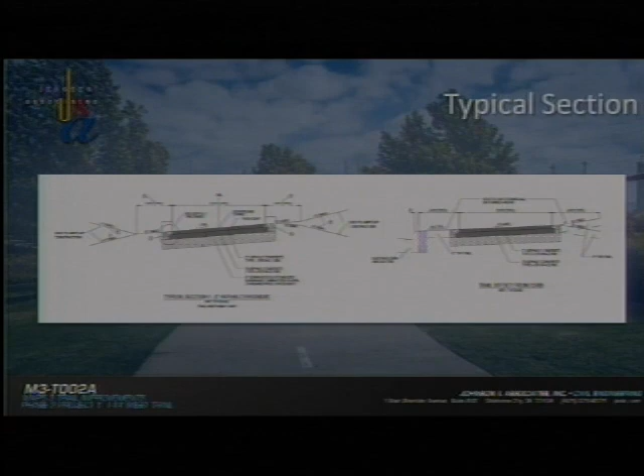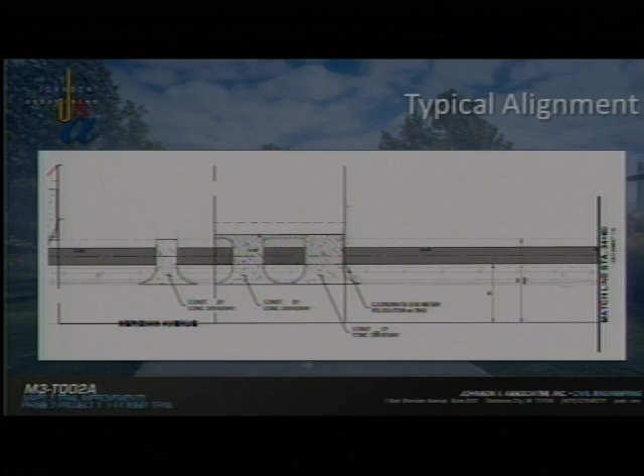In plan view, looking from above, this is a typical alignment for Project 1. Most of our trail is adjacent to the street, so we've located the trail, which is the dark gray strip there, as close as possible to the right-of-way in order to have some separation from the roadway. This also shows crossing several different driveways, and at most of those crossings we're going to take driveways out and rebuild those in order to meet the accessibility requirements for the trail.

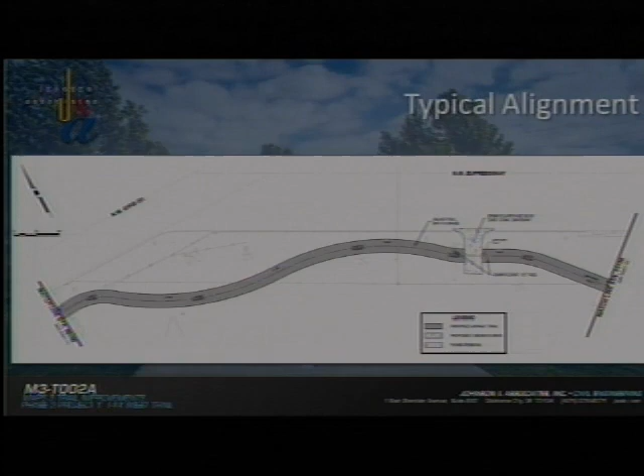So we'll look in some detail at the alignment. This is at Northwest Expressway and Meridian. We'll begin at the existing parking lot at the northeast corner of Meridian and Northwest Expressway. We'll connect to the existing trail that goes around the Lake Hefner facilities there. We'll cross Northwest Expressway on the east side of Meridian and head south to Northwest 63rd. We'll cross Northwest 63rd to the south side at that existing traffic signal, and then we'll head east down Northwest 63rd again on the south side of the street.

Going down 63rd Street, we'll cross several driveways, a few shopping centers, some public streets, avoiding quite a few utilities. As you would imagine, in an urban area, there's plenty of utilities to deal with along the route.

Along Northwest Expressway, we'll be on the south side. As I'm sure you're all familiar with that bit of roadway, that's a lot of right-of-way right there. We probably have about 50 feet of right-of-way, so the trail will be as far away from Northwest Expressway as possible, in order to maintain as much separation between the trail and the roadway as we can achieve. We do have one drainage structure to cross in Project 1, here on Northwest Expressway, just under the N. It's a drainage channel, and we're putting a pedestrian bridge across that structure.

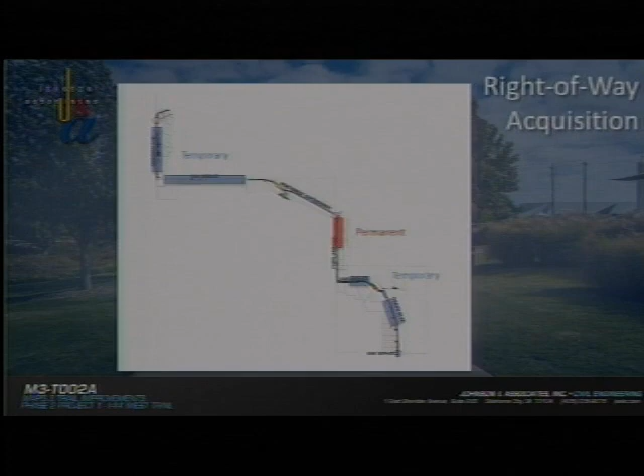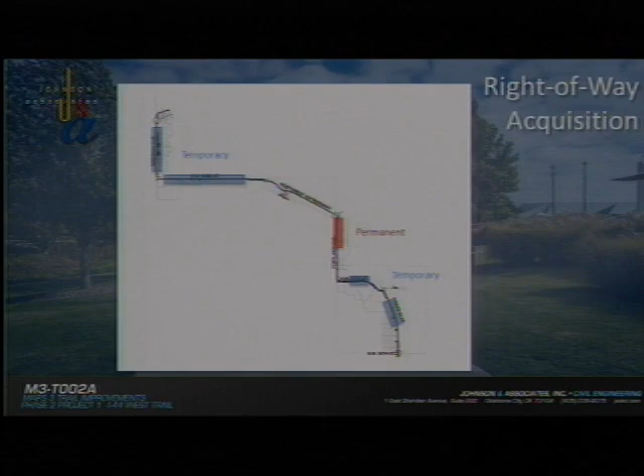A little bit of right-of-way acquisition to do with Project 1, most of which is temporary. That's for rebuilding driveways and parking lots as we get into making accessibility and grade separation work. We have one location for permanent right-of-way, which is at Northwest Expressway in Portland, on the east side of Portland at Messiah Lutheran Church, where the sidewalk, the trail, gets into the church's property there.

For schedule, we're here with a preliminary report today. We estimate another 60 days to finalize plans and specifications. We'll also begin right-of-way acquisition during that time. We have 3 months allotted for final approvals, bidding process, and award of contract, and then anticipate starting construction in September of this year, and we've allotted a 10-month construction window for the project. That'll have us finishing up, I believe, in July.

Dave, would you help me out with that date there? I can't see that screen very well. Okay, it's July, so 2016 was when we'd wrap up construction. So with that, I'd be happy to answer any questions for Project 1.

Questions? Sue, anything from the subcommittee? One thing I might remind everyone on this board is this is an urban trail. So it's not around a lake. It will be by some parks, but it's a challenge to build a trail like this, and it's new thinking for all of us. All three of our pieces have really taken into account how to do that. They know better than we. This is new for Oklahoma City, and the committee is excited, and I think all of our developers understand our concern about safety. So that's also foremost on their minds, too, as we develop these plans. So the committee did move approval.

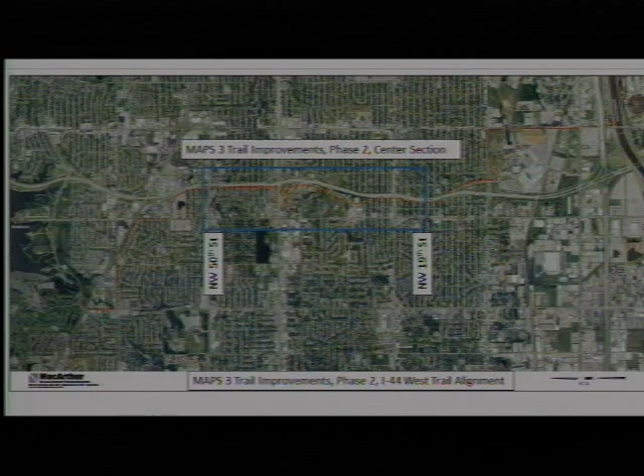Again, as David and Chris have both mentioned, this alignment is based on the alignment study report completed last year. This image shows the extent of the entire trail. The central section is shown in the blue box, beginning at Northwest 50th and ending at Northwest 19th Street, connecting to the North Trail at Northwest 50th and the southern part of the trail at 19th Street.

A quick overview of the center section: 2.77 miles in length, beginning at Northwest 50th and Grand and ending at the south side of Northwest 19th Street and Grand. There are three major signalized intersections in this section: Northwest 39th, Northwest 36th, and Northwest 23rd Street. Some points of interest identified in the Trails Master Plan would be Portland Plaza and Will Rogers Park.

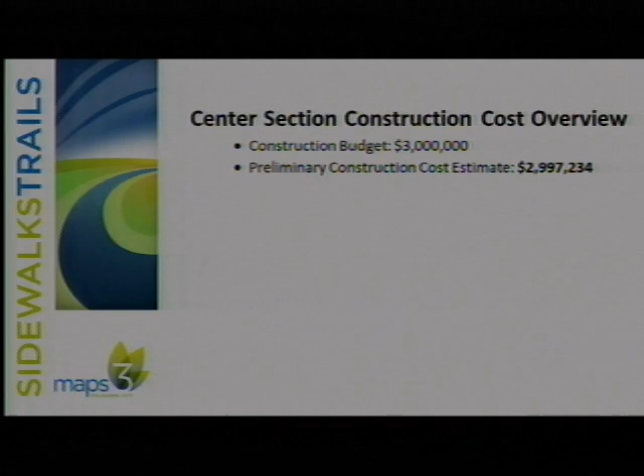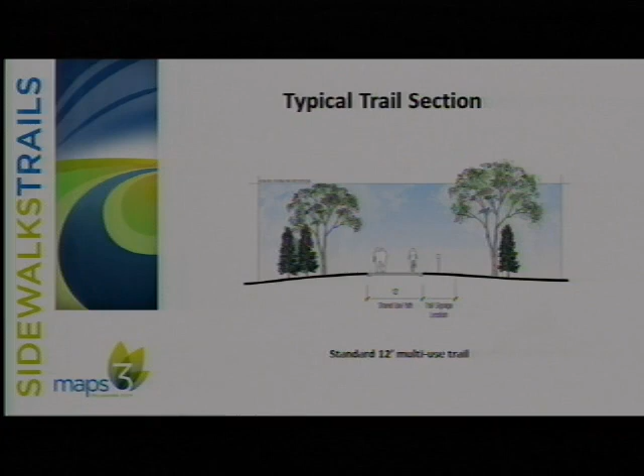The construction budget, as I mentioned, is $3 million. We're coming in just a little under that, $2.99 million, based on preliminary design. Again, this is going to be similar to all three sections. This is an image showing a standard trail section: a 12-foot-wide asphalt section, with space for shoulder on either side.

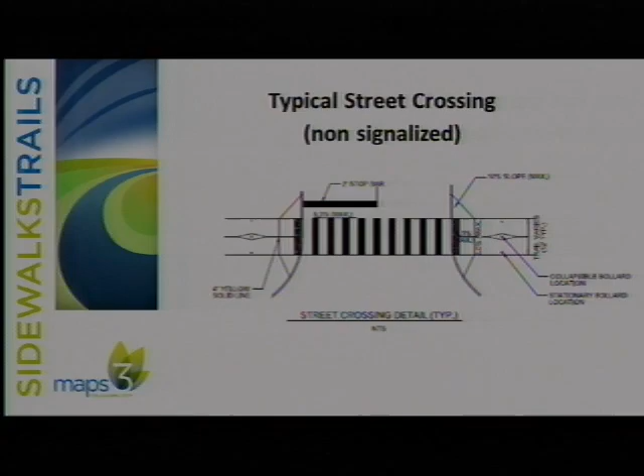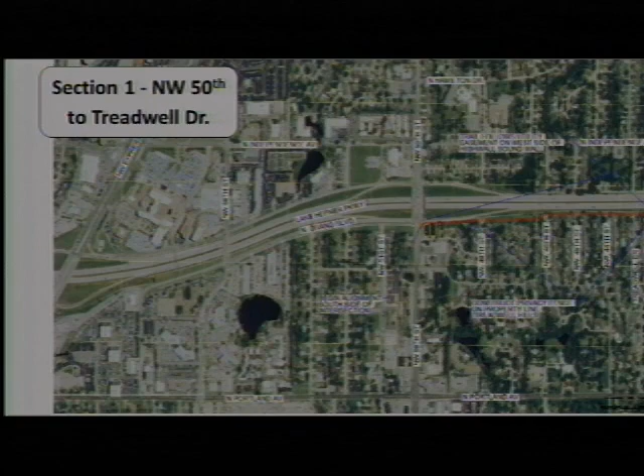I've split the central section into three parts so we can look at the alignment in more detail. As I mentioned, we begin on the south side of Northwest 50th Street, at which point we follow the existing utility easement, which runs on the west side of I-44, between the Lake Hefner Parkway sound wall and the edge of the Treadwell Hills neighborhood.

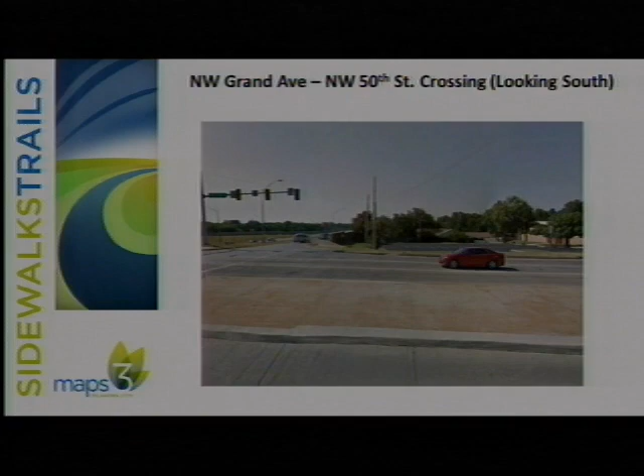This image shows the beginning of the central portion, at the Northwest 50th Street intersection looking south. You can see the beginning of the utility easement in the center of the picture. This is a typical view of that utility easement—you can see it's between 30 and 50 feet wide, so we have a lot of space for the trail.

We can avoid trees and utilities in this area. The street the image is taken from is Northwest 48th Street, and you can see it's a dead-end street, but it is a city street, so we still have to cross it. People use it to turn around, but it's a lot safer than a standard street crossing.

This is just one more image, and you can see some of the utility impacts in that area and some of the things we'll try to avoid with the trail. You can also see the edge of the properties on the right of the image. There is provision in the preliminary design to look at replacing that fence.

That's one item we would consider. Obviously, people don't always have the same type of fence—some people don't have a fence at all. So something we would consider is putting a fence along the trail at the property line.

The next section of the trail continues on that utility easement all the way to Northwest 41st Street, at which point Grand Boulevard continues, and we'll follow Grand Boulevard all the way to St. Clair, which we'll use to cross Northwest 39th Street, or Northwest 39th Expressway, on the east side of the road, and then we'll continue on St. Clair Avenue.

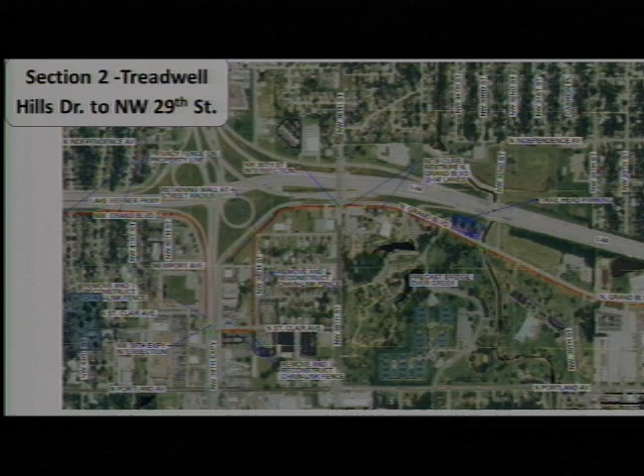There's also a creek through the park, so we will require a pedestrian bridge over that creek. A couple of images of that section.

This is the Northwest 39th Street Expressway. You can see the ODOT right-of-way fence. That fence will be reconstructed as part of this project. It's a short section - it'll just ensure that we have a consistent fence alongside the trail to separate it from traffic.

This is the signalized crossing over at Northwest 39th Street. You can see that there is infrastructure in place that will obviously be modified to incorporate the trail section there.

This image is Grand Boulevard looking north towards Northwest 36th Street. You can see the Will Rogers Exhibition Center, and you can also see the landscaped area between the parking and Grand Boulevard. In the design, we try to avoid impacting that.

This street is actually between 38 and 40 feet wide as a two-lane road, so we have room to move that existing curb out into the street 5 or 6 feet to allow us to get a trail alongside that landscaping area without impacting it at all. So the curb will be shifted over and the stripes will be repainted to construct two standard 12-foot lanes. This is the trailhead parking area I mentioned.

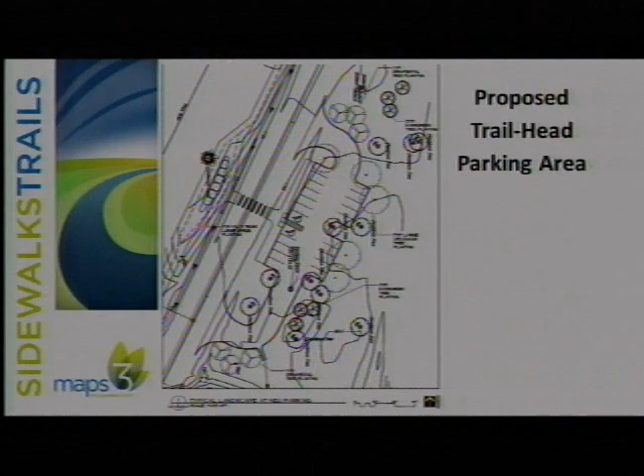On the other side of Grand, you can see the existing trees, and the design incorporates keeping those trees as much as possible - almost designing the parking around them. You can see from the next image how we've got new plantings and also the existing trees built around the parking area. That parking area will have about 30 spaces, but we have the flexibility to add a few more depending on exactly how much space we have.

Finally, the last section takes us all the way to 19th Street. We'll continue on the west side of Grand Boulevard, all the way to the south side of Northwest 19th Street, where we'll connect with the southern part of the project.

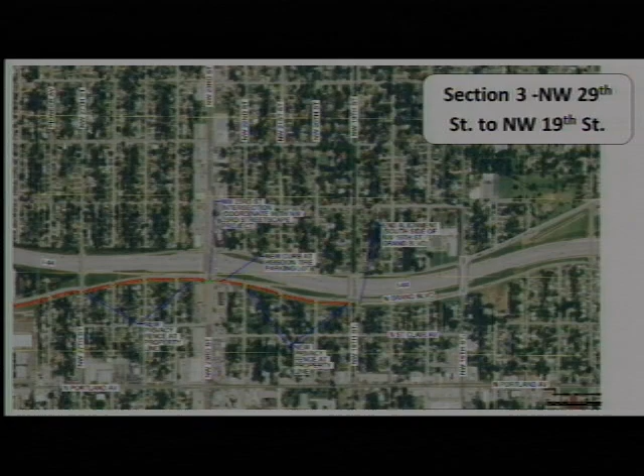We do have a major intersection at Northwest 23rd Street. That street is currently being reconstructed as part of the Northwest 23rd Street streetscape, and we've been coordinating with the design engineer and also the City of Oklahoma City just to ensure that what they're doing meshes well with what we have planned. We don't want to rip out the ADA ramps that are going to be constructed, so they're going to have wider ramps at that location that we can simply tie into when we start construction.

This image is taken at the intersection of Northwest 23rd looking south. You can see there is a Hibdon Tire Plus at that location - this just gives an example of where we'll be going. You can see the existing right-of-way line actually runs on the nearest parking areas, so that facility is actually in city right-of-way, meaning we'll be utilizing some of that area. We'll minimize the impact to the business, but we don't require any easement at that location - it's just a case of reconstructing what's there a little bit to allow the trail to pass through.

Continuing on, this is at Northwest 27th Street looking south. Much like what I described at the utility easement south of Northwest 50th, this is another area where we have made provisions to build a fence alongside the trail. It's something we will consider as we go into design, but there are some areas with no fence and some with fences falling apart, and this image illustrates that. The nearest fence is not in good shape, and the next home doesn't have a fence at all, so constructing a fence would help create a separation between the properties and the trail.

And this is the end of this part of the project. This is Northwest 19th Street. We will cross over at this location and transition into the southern part of the trail.

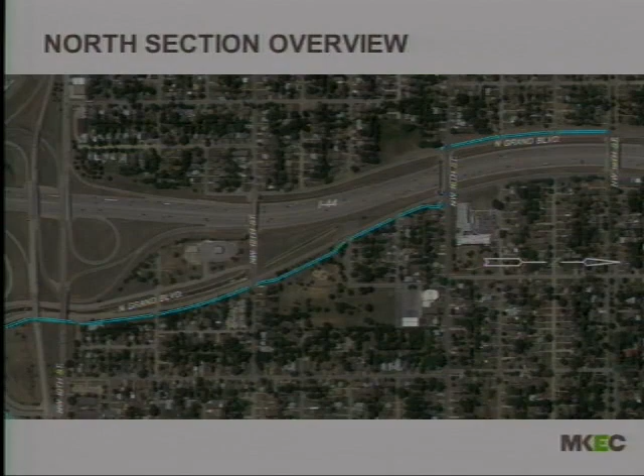I'll go over these sections in more detail. This is the north section, and we'll pick up on the south side of 19th Street, where MacArthur stopped their portion of the trail. We'll go along the west side down to Northwest 16th Street, using that existing bridge to cross there—I have a detail of that we'll talk about in a minute. Then we'll run along the east side of Grand Boulevard all the way down and under the existing Northwest 10th Street bridges.

These are just some details, a few photos here. This is the existing Northwest 16th Street bridge, and as you can see, it's striped for 3 lanes of traffic, with some additional pavement area before you get up onto the sidewalk. So we'll be utilizing that for bike lanes as well as the existing sidewalk for pedestrians.

This is a detail of that crossing. What we're suggesting is that the bike lanes will be on pavement and directional. For instance, westbound bicyclists will use the north side of the bridge to cross, running with traffic across the bridge. Eastbound bicyclists will use the south side of the bridge, also running with traffic, and pedestrians will use the sidewalks.

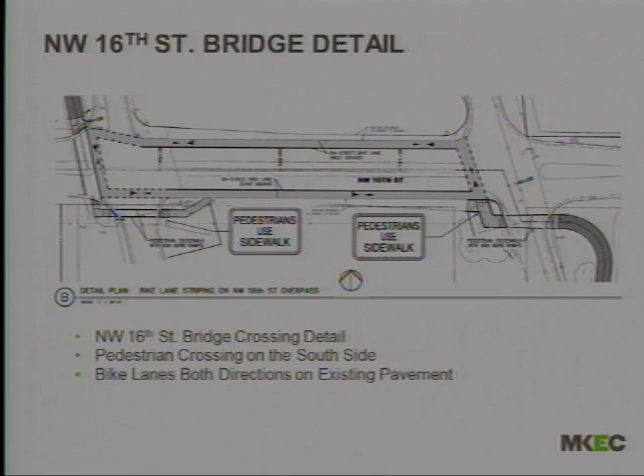I would mention that ODOT currently has a project to rehabilitate this bridge, and they will be replacing this deck. We have met with ODOT and discussed what that rehabilitation looks like and what their deck section will look like. They have agreed to allow bicycle lanes 8.5 feet wide on each side, with at minimum a 5-foot sidewalk on each side of the bridge for pedestrians to cross. So the layout will be similar to what you see here, even though it will be a new deck.

This is a detail and photo showing the crossing at Northwest 10th Street. We will be crossing under the existing bridges. As you can see, there is an existing sidewalk there; however, it's not wide enough to be classified as a trail. So, as shown in the detail, we'll be cutting off the concrete slope wall and building a new concrete retaining wall that's vertical to create enough space for the adequate width of the trail.

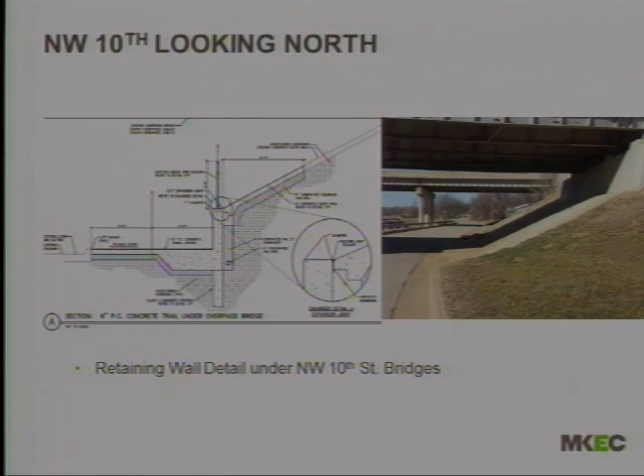The next slide shows the central section of this trail, picking up at the Northwest 10th Street bridges. Then we drop down and go through or adjacent to State Fair Park, along the south side of Northwest 10th, and then along the west side of May Avenue down to Reno.

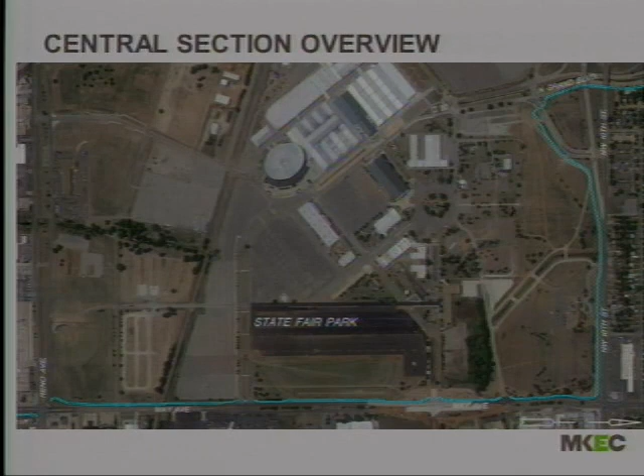Just a few details on this. We will be crossing under the UP Railroad Bridge, and one detail I did want to talk about before we get to the Railroad Bridge: at Grand and Gordon Cooper Boulevard, within the State Fair Park area, we had one suggestion for a deviation from the MacArthur report. They had shown what we call a mid-block crossing at that location, and we're actually suggesting moving that to the intersection so that trail users will cross at the intersection.

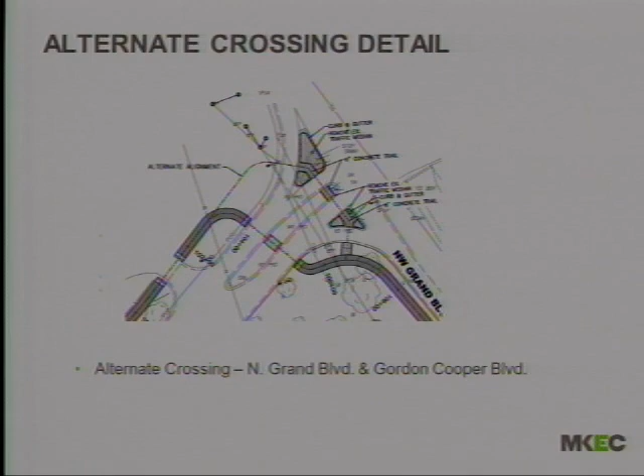We will rebuild some existing islands in the pavement there to create places of refuge, so that users can cross a lane of traffic, look to see that there's nothing coming before crossing the next lane of traffic, and so forth. We just believe this is a slightly safer option for the trail users.

This is the west side of May, south of Northwest 10th. In this area, we'll be utilizing the existing sidewalk wherever possible. For instance, if it's an existing 6-foot sidewalk, we'll add a 6-foot section of concrete adjacent to it, and we've discussed how to make those joints as small as possible so they don't cause problems for bicyclists and inline skaters. So some of these areas will be a concrete trail utilizing the existing sidewalk.

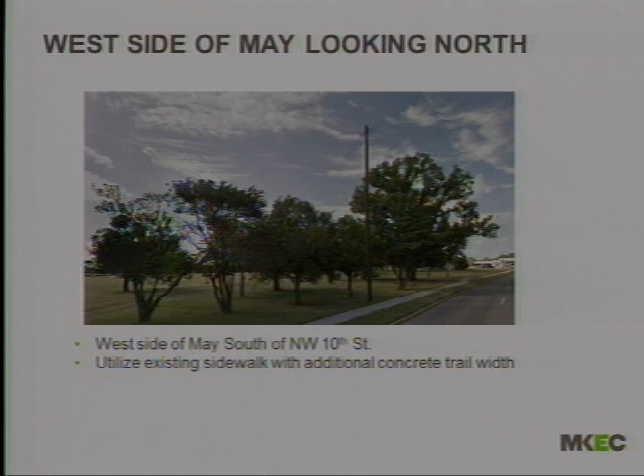This is one area I'd like to bring your attention to. This is an existing retaining wall, again on the west side of May. We're looking north, adjacent to State Fair Park. On the left side there's an existing stormwater detention area, and then a berm with lots of trees that were recently planted as part of the May Avenue Streetscape project.

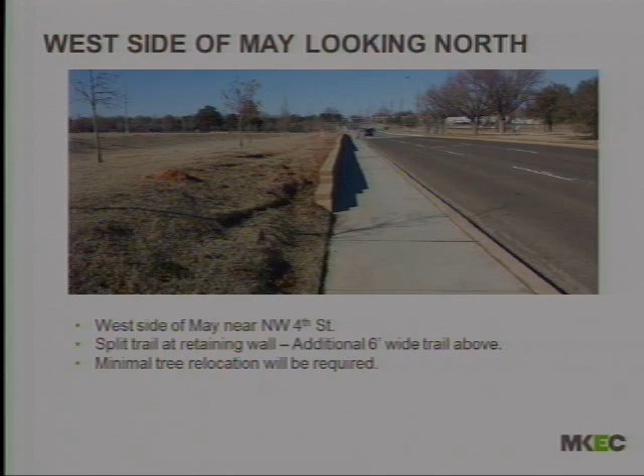In this location, we're actually suggesting that we split the trail. We have a 6-foot sidewalk below the retaining wall, and what we're suggesting is that we take a 6-foot trail up above the existing retaining wall. This way we can keep more of those existing trees that were recently planted, and it actually reduces the number that have to be relocated from somewhere around 30 to about 10. So rather than having to relocate a bunch that were just planted, it also allows us to use the existing sidewalk as part of the trail.

Trail users will see signage, and it'll be split in a directional manner, so that northbound users will use the lower sidewalk and southbound users will use the upper sidewalk.

This is the UP Railroad Bridge. There's adequate space under the bridge to place our trail. We'll be replacing the existing walk, as you can see it's not in very good shape, so we'll be replacing that existing walk with our trail.

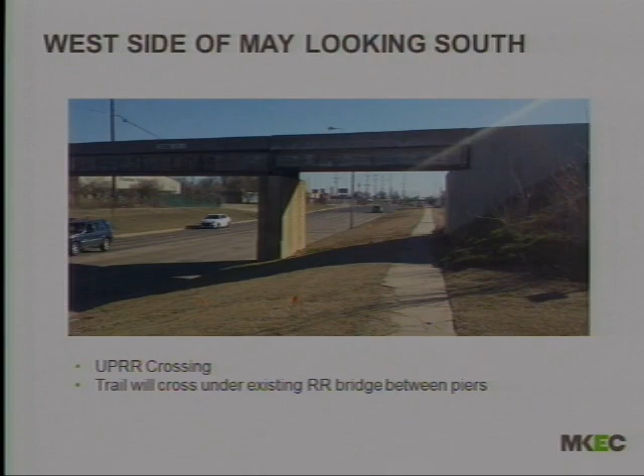Quick question about that—if memory serves, we've had some difficulty crossing under railroad crossings in the past with other projects. Are we already talking to these folks? We have, and we've started conversations with them somewhat, and there's already an existing sidewalk under there, so I think there's precedent for that. But yeah, we're aware of that, so we'll make sure we take care of it. Good, we want to be able to use it when it's open.

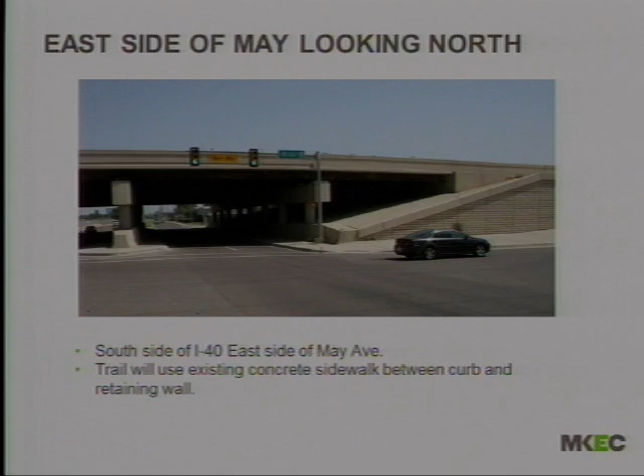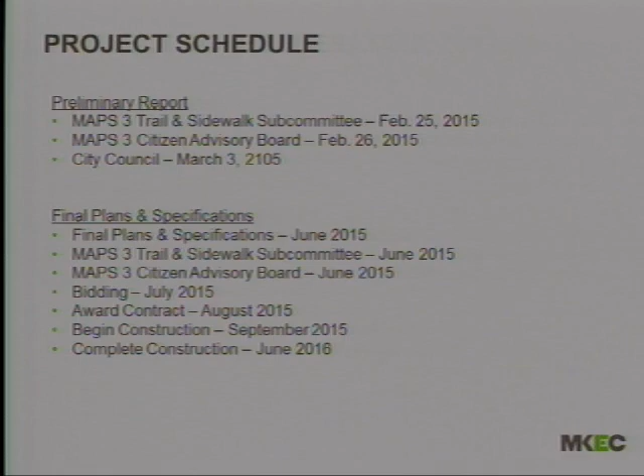The project schedule will run concurrently with the other two sections of this trail. Final plans in June of this year, construction anticipated to begin in September, and we're anticipating construction completed somewhere around June of 2016. I'd be glad to entertain any questions.

Yes, I want to revisit lighting. I know you stated in an earlier presentation that you have street lights in many other sections. In some other urban settings, I've observed that street lighting has not been adequate for those who would use the trails, particularly in the fall of the year, or nice days in the winter—there were lights placed along the trail. I have not seen an indication of this. I've looked very closely at the visuals you provided, and I don't believe there's really adequate lighting. The committee may have looked closely at this, but I'm very concerned that we're building space to be used during the day possibly, but when we're not in daylight savings time, if those trails are going to be safe enough to use and be well lit rather than carrying your flashlight with you.

Let me mention that during the study MacArthur did, we had all the public input, and a lot of comments were that some people were concerned we were putting trails along their side yards or backyards, and didn't want lights that would conflict with their homes.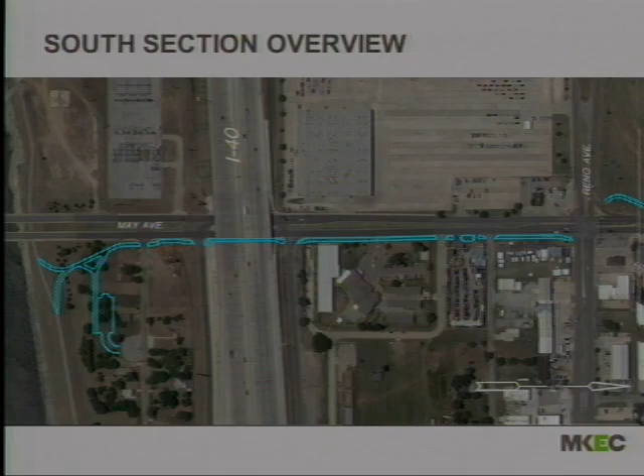Does that further answer your question? And are we planning anywhere along the route of the trail any sort of restroom facilities or anything along that line? No, we're not.

With this being an urban trail, there are opportunities for some of the businesses to be used, I suppose.

Refresh my memory on the rationale for these trails when it was proposed—I was not here on the advisory board. Well, this follows the recommendation from the Trails Advisory Board on location of trails. That's about all I can tell you, because I wasn't here either, but I know it comes from the Trails Advisory Board wanting to have a combination of different types of trails.

We have the river trails, and we have the West River Trail we're doing, which is certainly different than this. This being an urban trail, it can also be used as a path for people to get to work downtown. If you live northwest, you could use this trail all the way down to the river, come along the river, and back up, getting downtown by bicycle without being on city streets.

Gloria, I thought about this in the beginning as being the MAPS 3 piece of the trails as being kind of the connector of all the other trails. We had existing trails and a master plan presented to us early in the process, and at least the way I thought about it, we were trying to provide connectivity to other trails that existed to ultimately have a complete interconnected system. That's kind of the goal, I think.

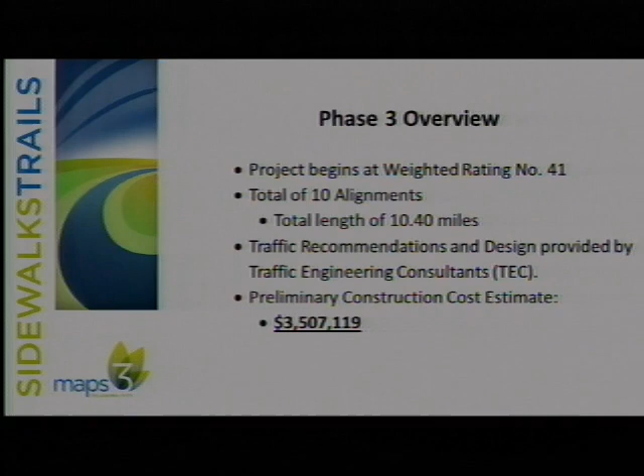Here's a quick overview of the alignments. As I mentioned, we start at 41 and move on down. All these sidewalk alignments across the city were rated and ranked from 1 to over 200, primarily based on location of the sidewalk and need, but also constructability and feasibility. As you'll see as we progress, as those numbers get higher, there's a higher possibility that constructability issues become greater. This is just a map showing there's quite a large spread across the city.

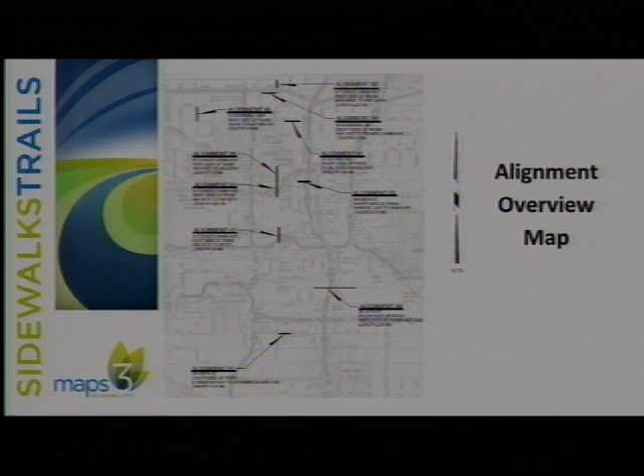The northernmost alignment on this is just north of Memorial on Penn Avenue, and the southernmost alignment is at Southwest 89th Street.

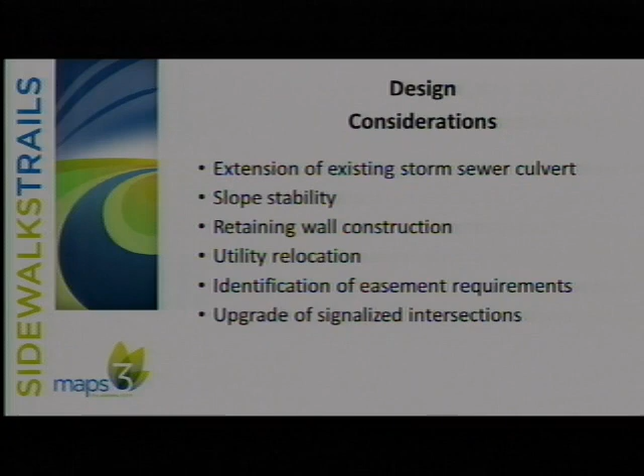I'm going to go through in the next few slides some of the design considerations we've had. The preliminary stage of this report is identifying some of these considerations, identifying the costs associated, so we can determine how much sidewalk we can construct. In the final design, we will go back to each of these considerations and figure out exactly how we're going to construct that. Some of these items might include extension of existing storm sewer, slope stability issues, construction of retaining wall, utility relocation, identification of easement requirements, and upgrade of signalized intersections to provide pedestrian access.

This is alignment 58, North Penn Avenue, again looking north towards Waterford Boulevard. This is an area that would require the construction of a retaining wall. There is enough right-of-way there.

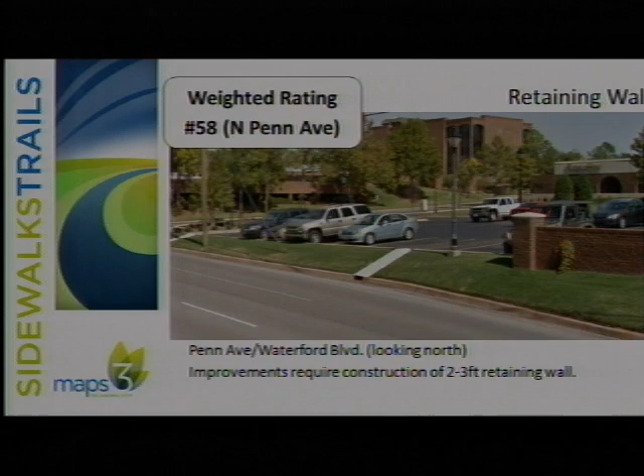The right-of-way line is at the back of the parking lot, at the back of the curb, but we would require a 2 to 3 foot retaining wall along this area. We'll also have to pass utilities. There's an existing wall and two flumes you can see there - just some of the challenges we'll have to address as we move into design.

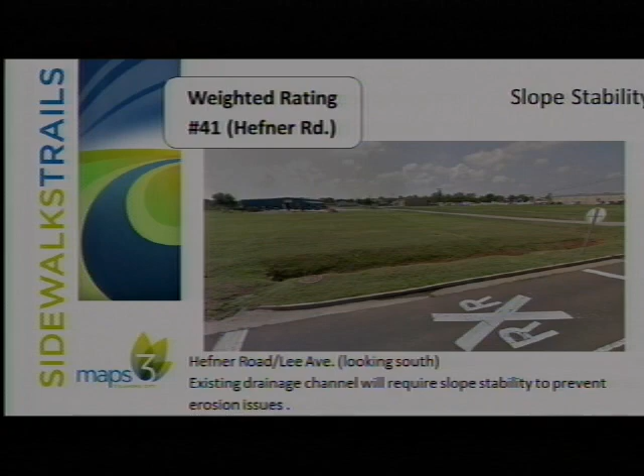This is alignment 41, looking south. You can see the existing drainage channel. Slope stability has been an issue on previous sidewalk projects and on some trail projects, like the River Trail, with erosion problems. So we're trying to identify those areas and make sure there's money in the budget for slope stability and erosion prevention, as well as for some of the existing facilities we have.

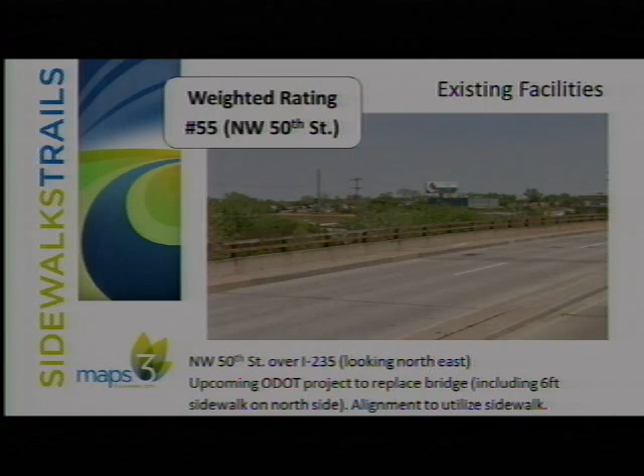This image is Northwest 50th Street, alignment 55 - the bridge going over I-235. This bridge is being replaced as part of the ODOT project to upgrade the I-235 and Broadway intersection, so we're coordinating with ODOT to find out what's going on. They will be replacing the bridge and constructing a 6-foot sidewalk on the north side, plus tie-ins on either side. We want to make sure we know where their project will end so we tie in appropriately, rather than building a sidewalk they'll just rip out and replace. That goes for a number of areas under construction or about to be, and we want to make sure we're aware of all of those.

Moving forward, after approval of the preliminary design, we'll move to final design, with scheduled completion in June of this year and bid opening shortly after in July. It's about a 9-month construction period, so we look to finish in summer 2016. Quick summary: a total of 10 alignments included in the preliminary report, 10.4 miles of sidewalks, with a construction cost estimate at the preliminary stage of $3.5 million.

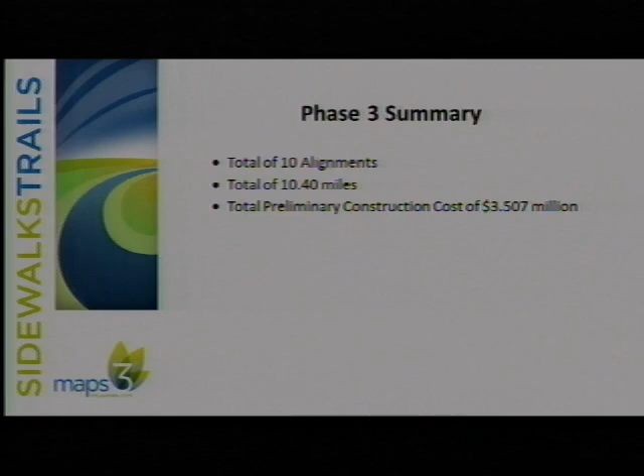And that is all. Any questions?

Sue, any comments from your busy committee? No comments - we're just tickled to bring, again, more sidewalks. Great. Any questions?

I had a question. Looking at the schedule of the alignments, I know we rank these in order, but it looks like some of them are being skipped. I'm curious what happens to the ones that look skipped, and have we really completed 40 projects to date, or were there some skipped in the earlier phase?

Oh, Michael Adams, I'm so glad you asked that. I was waiting for you to ask that question, number guy.

Some alignments appear to be skipped because other entities are using our list and building sidewalks - Public Works is doing some with fund balance money and other funds they have. That's probably the reason those are skipped. So the first 40 are being addressed, not all by us, and the majority of the gap ones too, because there are other projects mixed in. But we are attacking the list numerically. Okay, thank you.